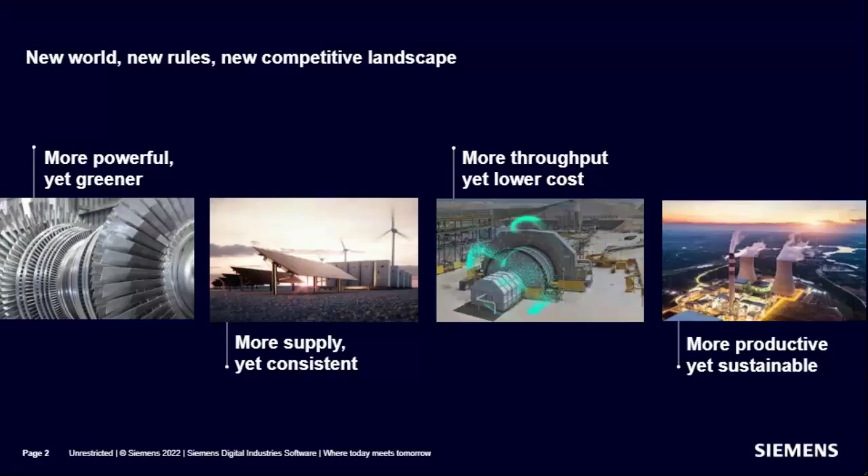Now, the challenge in terms of what comes with that is an explosion of complexity, and this has been gaining ground on us over the years in terms of the volume of data, the sophistication of the tools we're using, and we've got things like hypercomputing, more powerful computers. We've got the cloud, but at the end of the day, it's created enormous complexity, and this can be a challenge for some organizations, or it can be an opportunity.

So when we're looking at what's happening in the industry in terms of the trends, we really see two types of customers out there, two types of companies. Those that are adept at saying, hey, within this complexity, there's an opportunity, and we want to get there first, versus others that maybe feel the need to defend against this complexity and hedge the risks. And really, the most exciting innovations are going to come from turning that complexity into a competitive advantage. So it's a bit of a blessing, but it's something to hedge against as well.

So the analysts are always an interesting group to keep track of. I've clipped out a table here from a study done by the Aberdeen Group. They're one of my favorite analysts. They always have lots of substantiating data. And I liked what they were saying here in terms of how companies are using simulation to improve their product designs. A product design in energy, it could be a plant, it could be a project, it could be an asset, it could be a system, but collectively, they're all at the end of the day products.

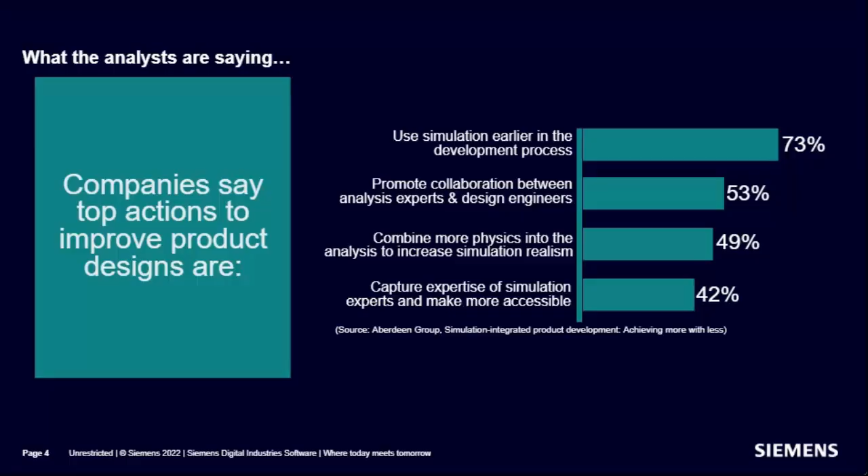We're looking to combine more physics into the analysis to increase the simulation realism, making sure that once we produce this thing in real life, it really does perform as the simulation suggested. And then lastly, at 42%, capturing expertise of simulation experts, making them more accessible. And that's got to be incredibly important because of demographics as well, as so many of these people are ready to retire. So if you put all this together, these are the various lenses that we look at through Siemens, and then we come back to the industry and say, okay, what's going on in the industry? We try to distill that down to 4 major trends.

Money is going to flow to where it is treated best, as we all know. At the same time, we've got the digital world accelerating, and that's changing everything. It's changing the way we produce software, the way our customers execute projects, and the way OEMs produce equipment, which in many cases are now computers that behave like assets. So that gets a vote in the trends we're looking at.

But most importantly right now, and this is what resulted in this webinar, is being able to execute on energy transition, which is so important on so many levels and requires an awful lot of innovation. As I mentioned at the beginning of this talk, that's where we like to play at Siemens, bringing deep engineering solutions to help those people trying to solve problems on the cutting edge.

Seamless high-definition simulation provides reliable and realistic results for today's energy and process engineers. Maximize innovation and harness the power of multi-physics simulation to master complexity and improve predictability for sustainable operations. Empower engineering teams to light the way using Siemens Advanced Engineering Simulation. Remove human bias that can lead to preconceived conclusions, and instead create alternatives that no one has thought of before. Connect engineering teams using the cloud to promote collaboration and innovation while improving change management and data reuse. Use design exploration to understand the complex non-linear relationships between process variables and behavior, to think out of the box to achieve operational excellence while improving sustainability. Connect distributed teams with cloud-enabled engineering simulation and test solutions to focus your best minds, using a systems engineering approach to improve teamwork across all disciplines. And empower engineering teams to light the way using Siemens Advanced Engineering Simulation.

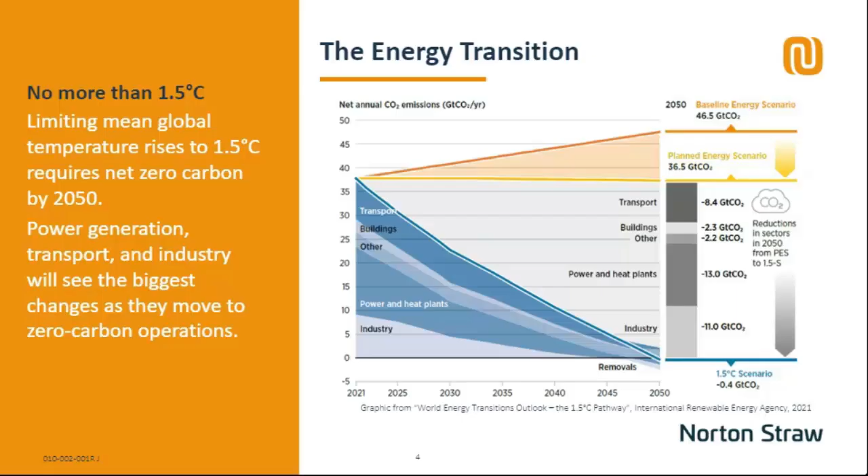Oh, I've accidentally skipped one. Beg your pardon, it's doing that. Why is it doing that?

Stop doing that. Right, that graph came from the International Renewable Energy Agency, and they also predicted that there should be 6 major contributors to carbon reduction. The big two there are renewable energy and end-use electrification. Both of those are obviously ongoing fairly rapidly, and we will talk about those in a bit more detail going forward, because there are some significant challenges caused to the electrical grid by doing things like that.

The electrification thing is not just cars, but also industrial processes and domestic heat. In many parts of the world, domestic heat is provided by gas boilers and similar activities. It's purely transport, domestic, and industrial uses. Energy conservation is already having an effect, and I'll touch on some numbers on that later on.

The role of hydrogen is very interesting. Hydrogen itself is not necessarily a green fuel source, it depends on how it's generated. It's probably best seen as a transport vector and a storage medium rather than a fuel source. The number IRENA uses there of 10% is also up for a lot of debate. Some people think hydrogen could be an awful lot more important than that. That's a working number in there.

And down at the bottom, we've got carbon capture and bioenergy with carbon capture, or BECCS, as it's often known. Conventional carbon capture is taking industrial processes or power generation, sequestrating the carbon dioxide and pumping it offshore into disused gas reservoirs, usually, or even onshore disused gas reservoirs or salt caverns. Bioenergy with carbon capture offers the prospect of negative carbon, because it's taking bioenergy, which is in itself almost net zero, but then taking off the carbon dioxide generated through combustion of the bioenergy, and storing that in an offshore storage environment. So that's a negative contribution, which is really quite something.

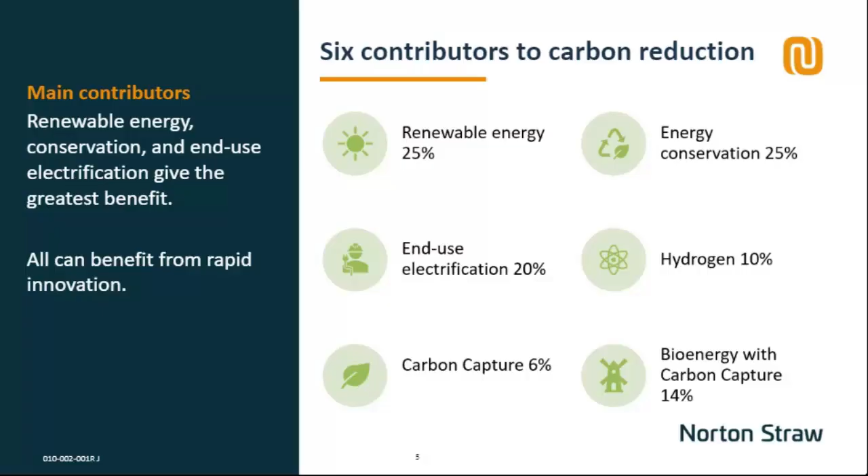In a typical industrial society, and it does vary from society to society, very roughly 20% of energy is carried by the electricity grid, roughly 40% in natural gas networks in those countries that have them, and another 40% in transport fuel. That's that 20-40-40 split, which is fairly typical.

If we're going to use electricity instead of carbon fuel for vehicles and for some industrial processes, then the grid capacity has to increase considerably. Also, the electricity being used to generate that grid has to be almost entirely renewable, 90% in the net zero model, because of the carbon sequestration aspects there. Also, the grid installation rate has to increase. If we're going to target 2050 with 3 times greater electricity generation than there is now, of which 90% is going to be renewables, then the replacement rate or the expansion rate of the electricity grid has to be 4 times greater than it is now.

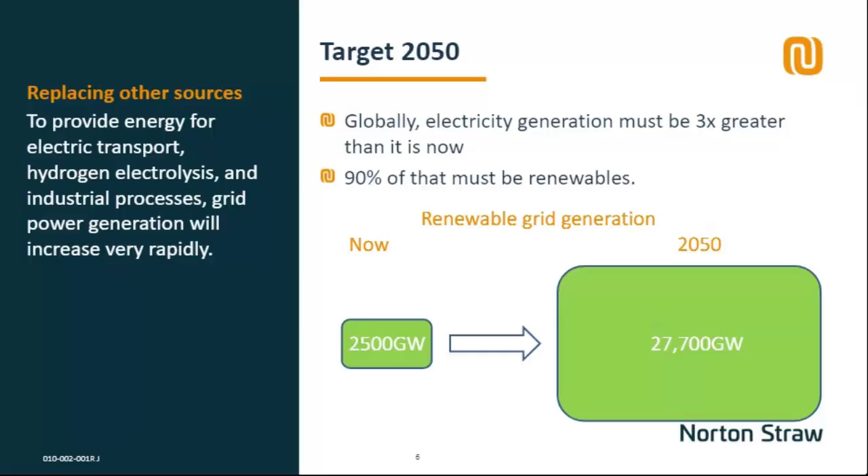This is a fundamental change in the nature of the future electricity grid. We're going from a traditional model where you have a relatively small number of large electricity power generating sources - nuclear power stations, large coal power stations, even large gas power stations - which are usually fairly widely distributed across a country or a region. The electricity is transported on a core grid, fairly high voltage, usually 400 kilovolts, and then gradually breaks down into smaller and smaller branches. It's a tree model, like a tree - you have a large core and then it branches down into smaller branches.

This is going to change because the energy sources are going to become decentralized. We have things such as rooftop solar panels putting electricity back into the grid now. We have domestic biomass generation, domestic wind generation, even domestic heat pumps. It's quite possible for a house to generate more electricity than it uses, and so that needs to go back into the grid. This gives a massive problem to grid stability.

Grid stability is usually about the balance between supply and demand, and imbalances are seen as changes in the electrical frequency of the grid, which is usually roughly 50 hertz. Those changes, if they go outside a certain bound, roughly 0.5 hertz each way, are sufficient to knock out equipment. We've already seen failures in some parts of the country. In the UK, about 2 years ago, there was a problem with a wind farm which went offline very suddenly, destabilized the grid, and led to a temporary blackout. So these problems do happen.

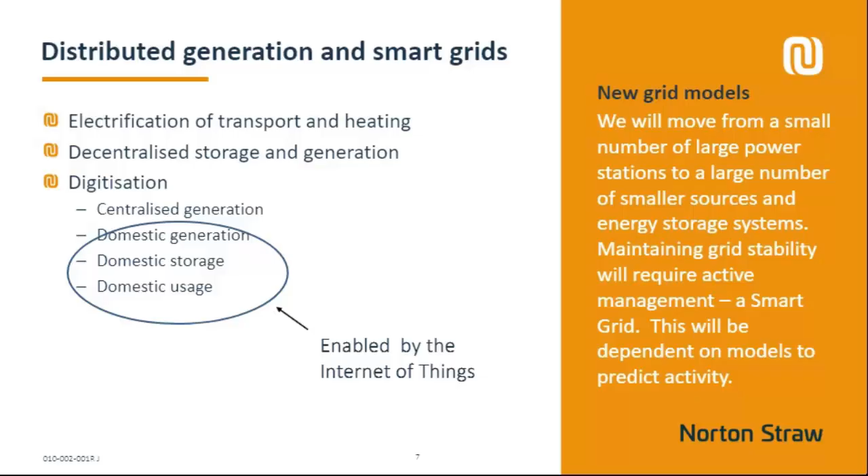Some of this is happening already. The EU mandated 80% smart meters by 2020. I don't think it quite made it, but it did mandate 80% smart meters by the end of 2020. So some of these changes are happening.

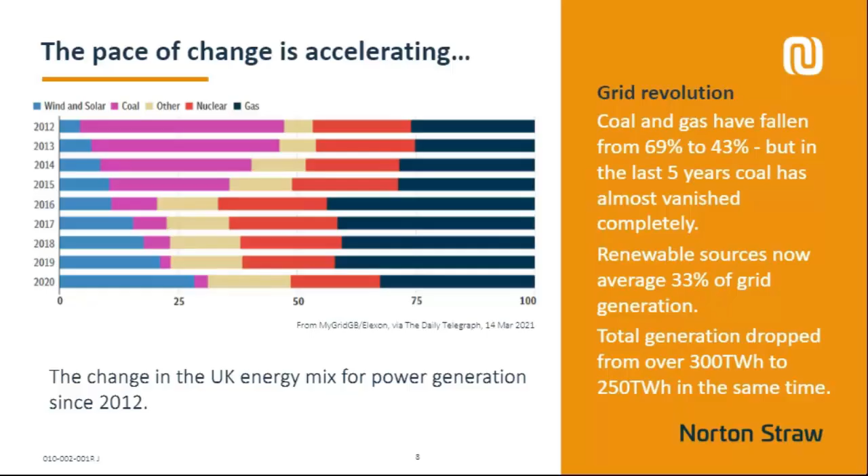There are three different ways in which we can use simulation, in addition to the digital twin approach, for actually modeling the grid itself. Firstly, there's the systems model - this is a system of systems, a classic system of systems, lots of different systems connected together into a system of systems.

By building detailed system models, we can do things like techno-economic studies. We can look at multi-criteria decision analyses, and different ways the grid itself can use tools - AMESIM comes to mind, and various other similar tools. We can use much more detailed or even reduced order models to model the design itself. So we do a very detailed model for design stuff, then break it down to a reduced order model to do design optimization and space exploration work.

Sometimes we can put these together into federated simulations and start to build detailed models of the wider system itself. Federated simulation allows you to put in these detailed models, or take them out and replace them with reduced order models, and then run them a bit faster to look at different options and different ways of doing things.

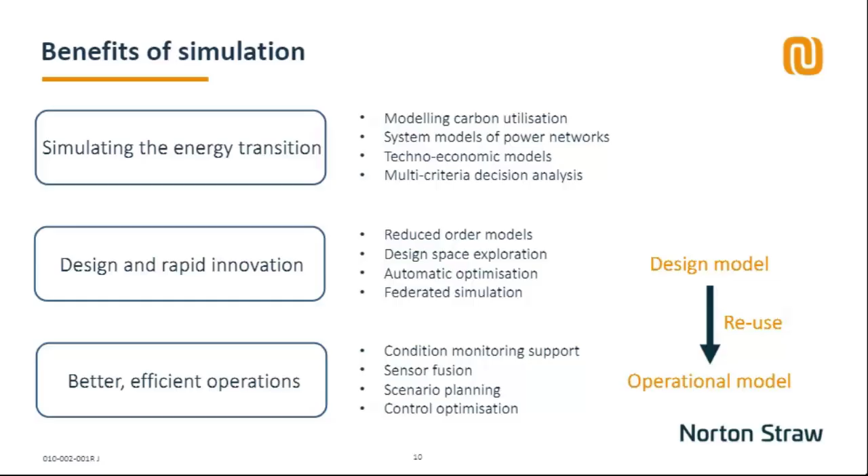Ultimately, those design models can be reused as a digital twin for operational models. In this case, we would take something, cut it down, and then deploy it in real time, operating to take condition monitoring data and interpret it using sensor fusion with that condition monitoring data. From that, you can do scenario planning, control optimization, and improve the whole thing. So there are three main threads to the use of simulation within the energy transition.

There's still some work to do here because a lot of the models that we have used historically, and I imagine much of this audience is familiar with computer modeling of engineering systems, has been at the design stage. And some of that expertise has not always gone across to the operational side of things.

Here's an example from the Dutch government, who announced the ending of natural gas extraction in 2018. In fact, for other reasons, they didn't quite get there, but they announced the end of it. They have a large number of community heating projects, shared heating systems, and had to identify alternative fuel sources for these. A lot of work was done with large-scale system models of the heating system and the power sources, but they didn't actually manage to get much benefit from that. So a study was set up to work out why the modeling of these systems had gone wrong.

They concluded that although the modeling approaches would add benefit, the problem was that the users on the operating side and the policymakers didn't really have the expertise to do it. There's a quote saying practitioners need new expertise to effectively use energy models. So it's not just about the quality and capability of the models we develop, it's also understanding that users may not be familiar with some of the techniques we're familiar with, and there needs to be a process of training and education to get the most out of modeling and simulation.

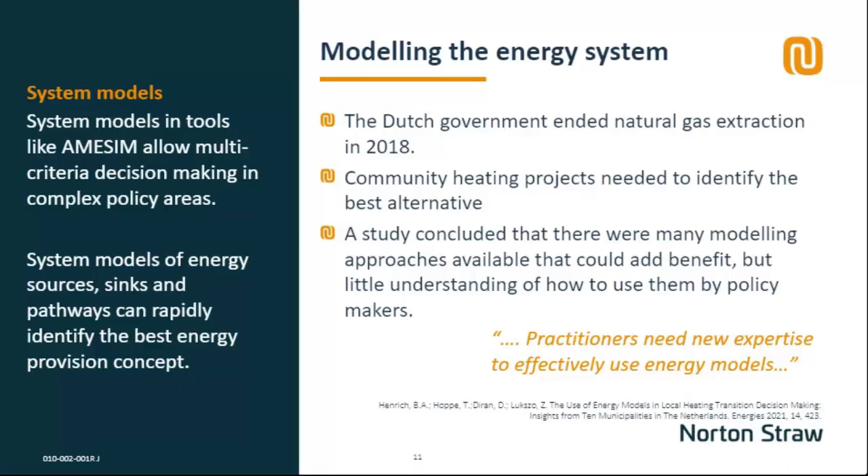I'm not going to go into some of the more detailed case studies I mentioned before. I'm going to start with a study in battery storage. An awful lot of work is needed in storage. People talk a lot about energy transition, and we think a lot about how it's generated and how it's used. But because so many renewable sources are intermittent, we also need to think about storage. The sun doesn't always shine, the wind doesn't always blow, the tide doesn't always flow, and the sea isn't always rough, and these things are all important for generating electricity. When that happens, we need to have a backup.

There are quite a lot of techniques being developed, including pumped hydro, which is already widely in use in both the Americas and in Europe, with more plants being developed. Compressed gas is coming online, both nitrogen and ordinary air as a source. Electrolysis to hydrogen, as I mentioned before, is perhaps best seen as a storage medium rather than an energy source. If you have too much electricity, you can generate hydrogen by electrolysis. There's a company called ITM Power, for example, developing relatively small-scale electrolysis devices that can be connected directly to individual offshore wind turbines, generating hydrogen that can be pumped ashore in the gas network.

And most obviously, of course, batteries. In this situation, a potential investor wanted to develop manufacturing facilities for liquid flow batteries. Liquid flow batteries are an interesting technology, really for larger scale energy storage rather than for vehicles or domestic applications, because they use a liquid catholyte and anolyte, pumped together through an ion exchange membrane to generate electricity that way. They can be scaled almost infinitely because it depends on the size of your tank for the anolyte and catholyte. They have great safety benefits because they're usually differences of the same chemical, so there's no chemical risk from them coming into contact.

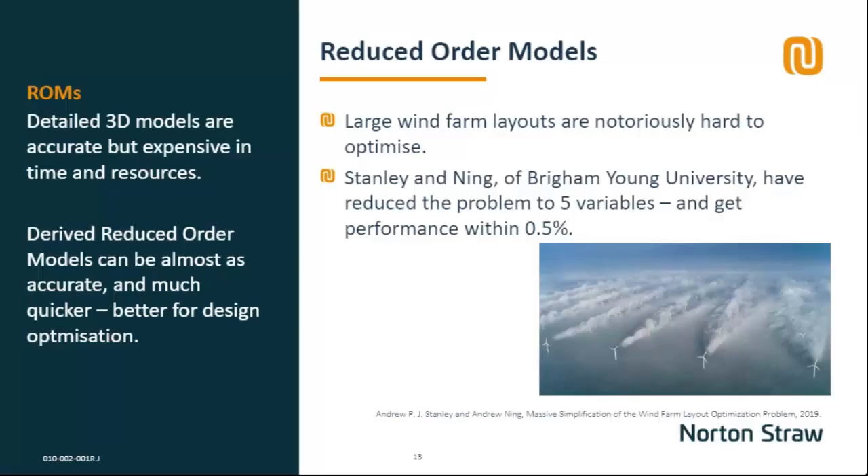They reckoned that they could reduce the complex model to 5 variables and get performance within 0.5% of the more detailed model. And that allowed them to start modeling all sorts of different wind combinations in a lot more detail. Now, one thing their paper doesn't talk about was how that could then be used as part of an operational digital twin, but I'm absolutely certain it could.

Transport is another one of the key areas where we need to make savings in carbon. And electrification is the obvious solution for rail. There is electrical technology out there that can be deployed, but it's not cheap. There's an awful lot of unelectrified rail out there, and installing it is both time-consuming and expensive. In the meantime, there are areas that are electrified and areas that are not, and some rail routes run across them, particularly in congested passenger route areas.

Battery power could be used to bridge those gaps as a potential solution, but the battery itself is potentially quite large and heavy. It has to be charged over a period of time, and of course the size of it means that it consumes some of the passenger carrying space of the train. So you want to optimize your battery selection to make sure that it minimizes the space consumption and is still able to be charged within the right time. To do that, we used models.

This is another AMESIM model, actually, where we modeled the route of a train of a particular application. And we had to work out what the gradients were, the friction against the traffic, crossing points, planned and potentially unplanned stop locations that might occur, accelerations as it pulls away from stations, and also take into account the charge. It has to charge while it's on the electrical juice, as they say, and that must occur sufficiently within the time it's on the electrical part of the line to carry it through the non-electrified part of it.

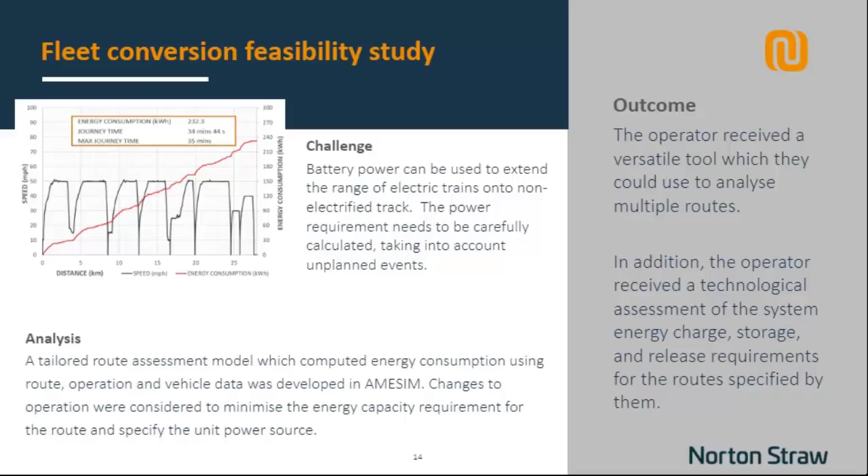And in this particular case, the end point of the line was also non-electrified, so there had to be an electrical charging facility there, and that had to be able to provide enough power to power the return journey. A fairly detailed system model was required, but it came up with the optimum size of battery, which I believe is currently in service.

More detailed analysis is perhaps a little bit more amenable and more obvious to many of the people on this call. This is a STAR-CCM+ model of a large-scale hydrogen fuel cell. This was for industrial use, so it was a big one. And they wanted to reduce flow non-conformity in order to optimize the performance and also increase the catalyst life within the design. So we had to rapidly assess a whole series of design variants, but also look at different scenarios, particularly startup and shutdown, to make sure that it would perform appropriately.

Hydrogen is a useful fuel because it can be potentially substituted into the gas grid, but there are also some risks associated with that. And one of the things we went on to do with this was look at some of the safety issues.

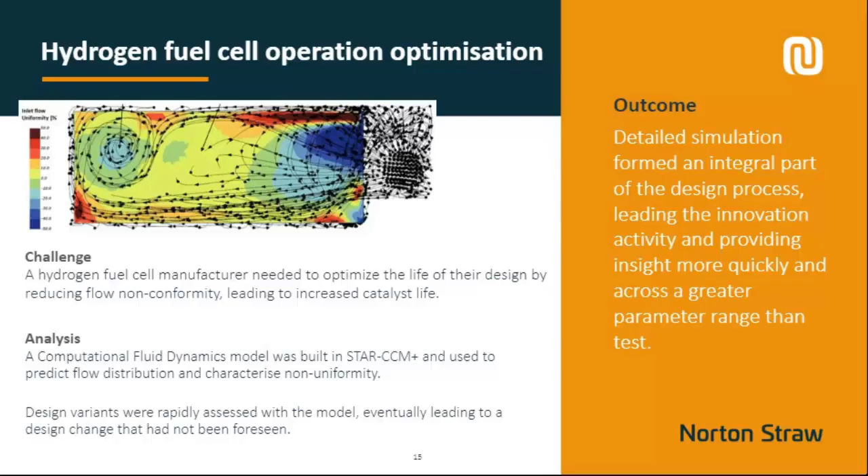It's a very wide flammability range, famously so, starting at 4% up until about 75%, at which point it could potentially explode. It's also got a very uncertain, what's called a deflagration to detonation transition point, the point at which the shockwave becomes supersonic and it ceases to be just an explosion and starts to become a detonation with very much higher overpressures and an awful lot of damage. And it's also very diffusive. It'll diffuse through sealing systems that other gases might not because it's a very small molecule.

However, it's a very appealing energy transport approach. The UK is moving to 20% hydrogen in its natural gas grid from 2025. And to support that, a lot of work's been done on modelling boilers, both industrial and domestic, gas burners for cooking, all sorts of different applications. And then also the safety studies to go with that.

And this was a bit of work on the external containment of a hydrogen fuel cell, the same hydrogen fuel cell shown before. And what we're looking at here is what would happen during the startup phase if there was an explosion within the vessel. So we use CFD to calculate the gas dispersion and see what sort of flammable gas clouds might exist within the vessel of different concentrations. Chemical equilibrium simulations to calculate the overpressure that results from the explosion. Of course, being a pressure vessel, it's a constant volume explosion, not a constant pressure explosion, and that makes a difference. And then FEA to see whether or not the vessel would fail.

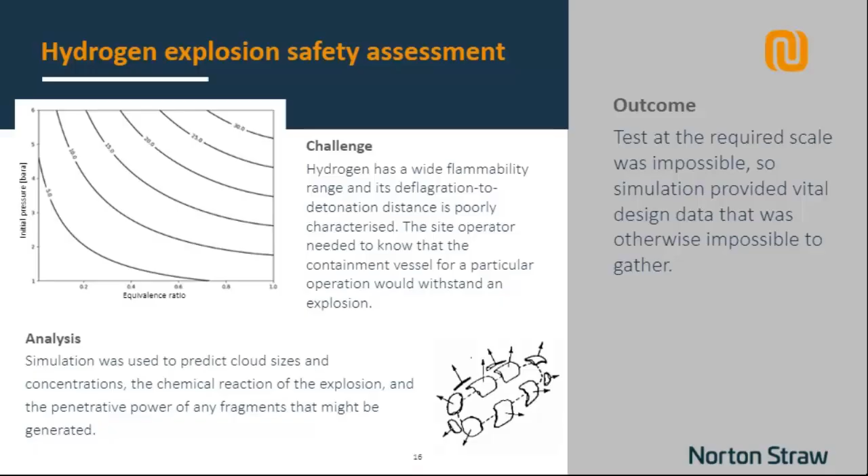At the start, I promised a rather more detailed one, and this is liquid hydrogen sloshing within an aircraft fuel tank. It covers work done by the Aerospace Technology Institute in the UK on hydrogen-powered aircraft. The hydrogen itself is stored as a liquid in a tank in the fuselage rather than the wings in a more conventional way. And as the liquid hydrogen heats and boils off, there's a risk that the pressure in the tank will increase to a dangerous level.

And the point of this study was to calculate whether the sloshing of the liquid in the tank would accelerate the boil-off of the gas and accelerate the pressurization of the tank due to increased surface area and mixing between the gas and the liquid components. The model had to capture the wall heating effect, wall boiling effect shown at the bottom of the diagram there, and also the interface heat exchange between the gas phase and the liquid phase as it sloshed about.

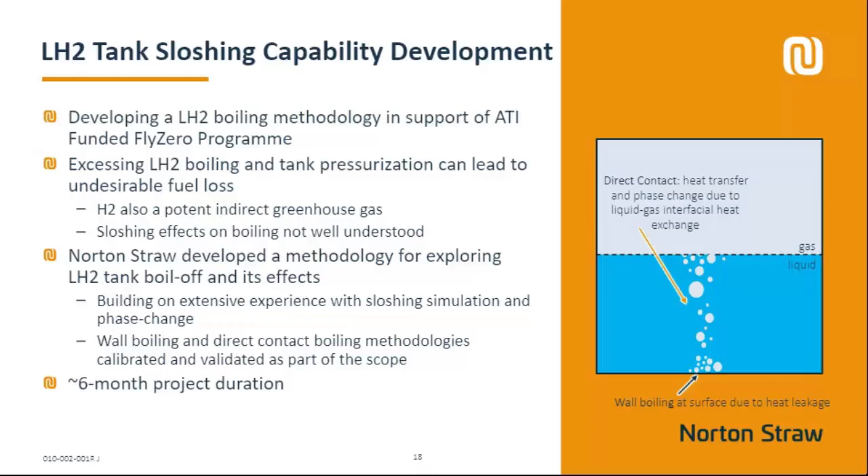So we had data on liquid nitrogen jet impingement onto a metal plate, and we could predict the transient plate cooling using CFD. So a STAR-CCM+ model of coupled liquid nitrogen, obviously with all the thermodynamics and phase changes that come with that, and then the subsequent cooling of the plate. We were able to get fairly good model results of that, but at immense computational expense. In order to capture the behavior, we needed very small cells, and that led through the CFL restriction to very short time steps. And you can see there some of the agreements we were getting, which was very good. But we had to come up with a better way of doing it.

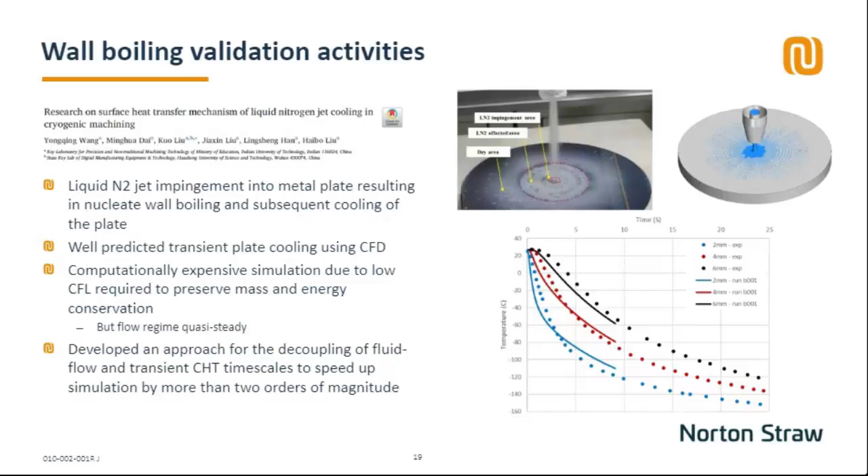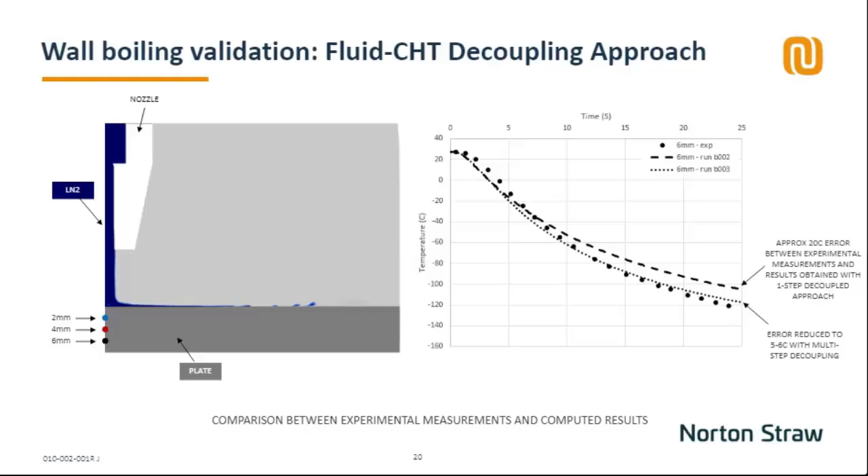So we developed an approach of decoupling the fluid flow and transient conjugate heat transfer timescales to speed up the simulation by more than 2 orders of magnitude. We had to do that right, though, because obviously the degree of decoupling affects the accuracy of the model. So we had to do different models of different degrees of decoupling to see which worked best. And you can see from these plots here, 2 different time-stepping approaches and the better accuracy that we got by optimizing that decoupling from about 20 degrees out to about 5 or 6 degrees out, which we thought was rather good, to be honest. So we went with that method as the way forward.

We then had to model and validate the interface heat transfer and the direct contact boiling that happened. And again, there's not a lot of data on sloshing of liquid hydrogen, so we had to use a surrogate. There is some data on a water and steam tank, and these have been used as a test basis as a way of studying natural gas, LNG tanks in large tankers.

The sloshing is induced by the rocking of the tank. The water is initially colder than the steam. This is slightly different, but we could work with that. So the sloshing of the tank happened, and the tank pressure was seen to drop as the steam condenses, which was not quite what we were expecting, which was interesting.

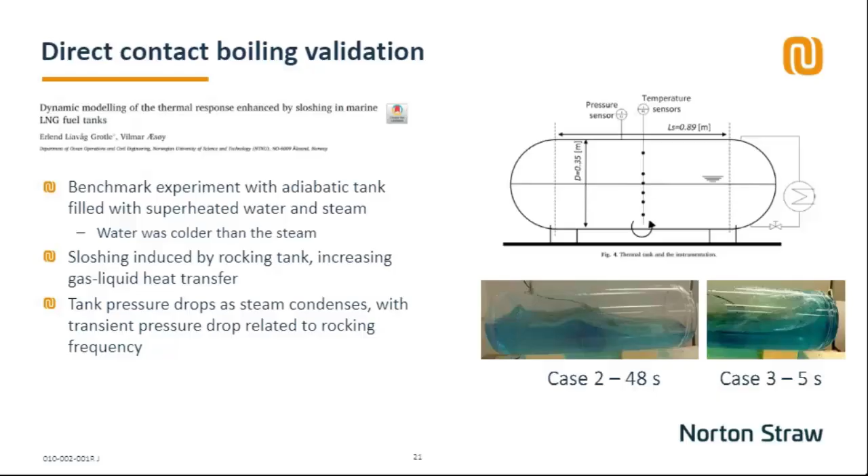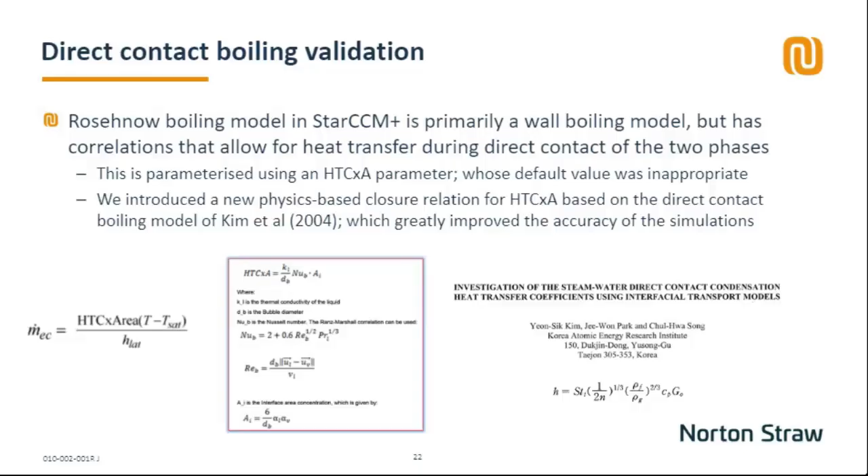The StarCCM+ model of the tank was built quite successfully, and the Rohsenow model within StarCCM+ was used for the interface boiling. We did make one small improvement using the user-defined function capability, and that was we optimized the heat transfer times area parameter there. The default value in the system wasn't quite right for a hydrogen situation or steam situation in this case, so we found a new physics-based closure model and applied that within StarCCM+ to get a slightly improved boiling model.

As you can see, we got quite good agreement with the validation work and the experimental work, very consistent with what's going on, and we managed to explain why the pressure was dropping rather than increasing, and that was simply because the heat transfer was happening the other way. Rather than the gas heating up the liquid and making it boil off, it was the other way around, and in fact we discovered that sloshing was a good thing for a liquefied hydrogen tank in an aircraft.

That was good because the alternative was to introduce baffles to stop it from sloshing. Those baffles would have acted as heat paths and actually made things worse. So this was a good result.

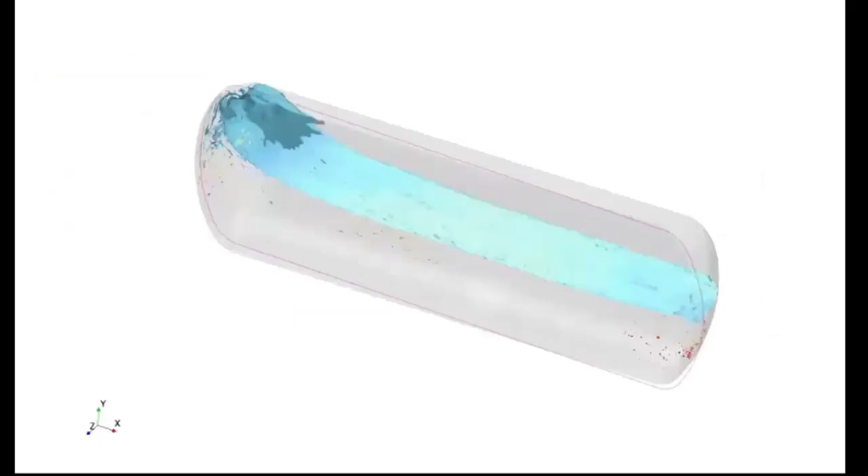On the next slide, I'm going to show one of the lovely, pretty pictures of sloshing that you can get from multi-phase CFD animations. It runs fairly briefly, but it does show the trick. And we then went on to run these models for liquefied hydrogen in different air conditions. So your classic gust loads and maneuver loads in aircraft. You can see the sloshing pattern there.

So in conclusion, things are happening quite quickly. I think more quickly than a lot of people realize. In the UK, the sale of internal combustion engines will be illegal by 2030. And John said at the start in Canada, it's by 2035. That's not very long at all. You know, it's only 8 years' time in the UK you will not be able to buy a petrol or a diesel car or a truck, which is possibly a bigger challenge.

I don't think any of the things we're talking about, the energy transition objectives we've got, are achievable without using a lot of simulation to study all the different options and all the different ways of doing things. So I think simulation has a massive role to play, both in simulating the wider system, the systems of systems, and also the details of the individual technologies we're going to have to use.